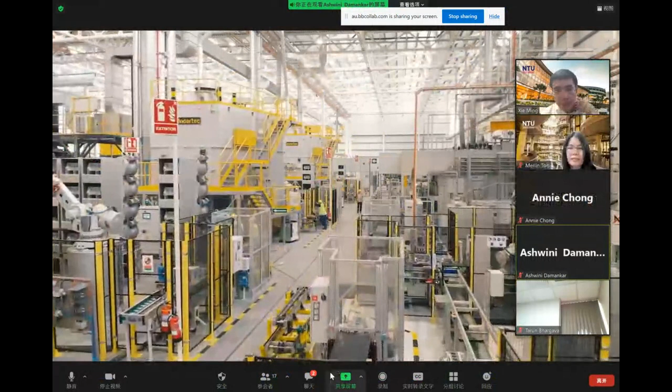Manager of Motores, one of the biggest mechanical plants of Renault. Motores plant today represents 1.5 million engines a year, which is 40% of the global engine production for Renault.

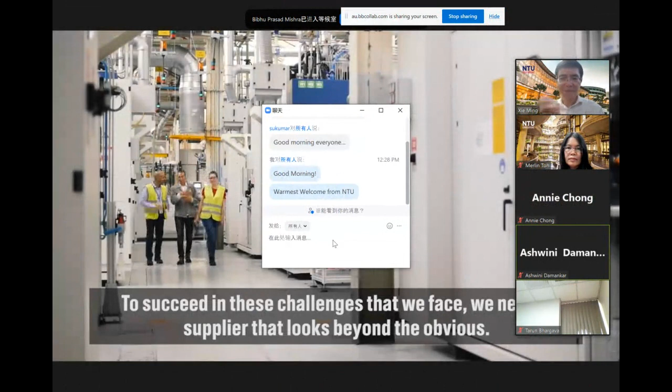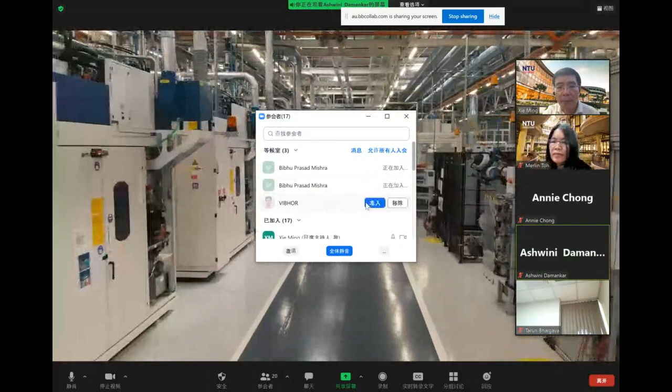Renault and Castrol have a very good partnership just because we share the same future. We have the same values and behaviors, starting with safety, quality, performance.

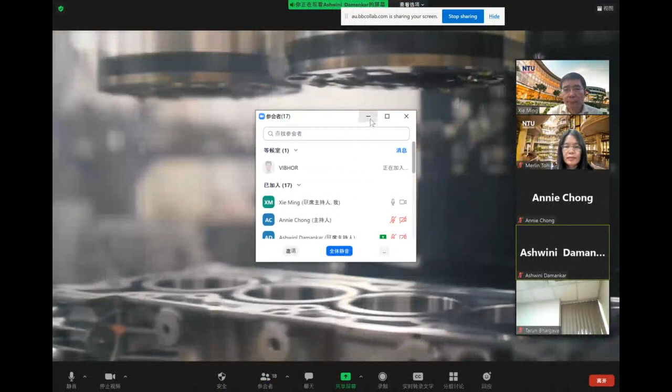What are we looking for about lubricant suppliers? It's the most cost-effective product to go with very effective facilities with digital monitoring. This is clearly the case of the XBB technology and CCC, the compatible cleaner.

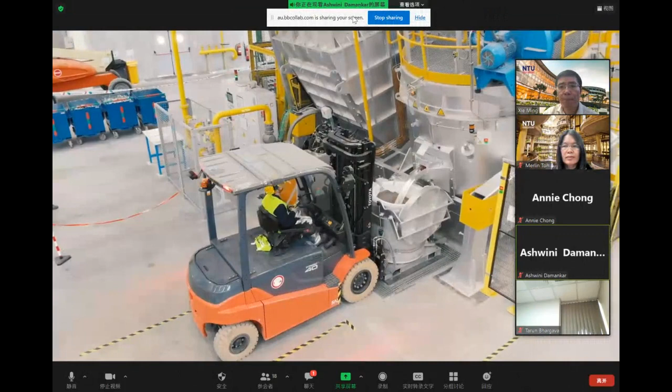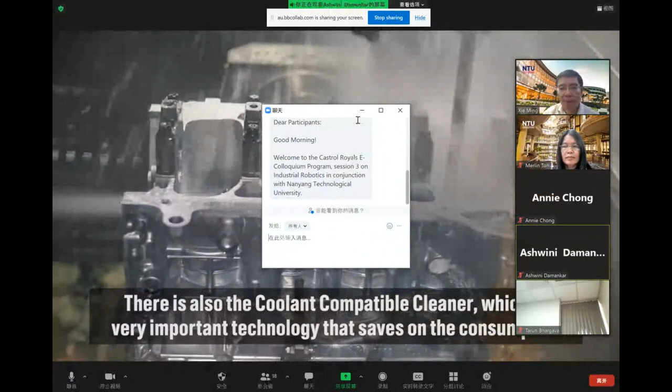With a great innovation from Castrol, we are able this year to save 1 million liters of water. Mediante el cual ahorramos tanto en residuos con la disminución del impacto al medio ambiente como en ahorro de agua, el consumo de agua, y ahorro incluso en productos.

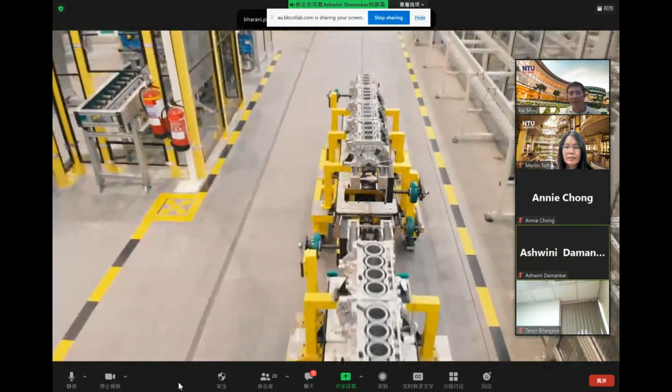When we have this combination of coolant and compatible cleaner inside, we put another resource that is not only the team who manages this, we put the smart control system that we can control 24/7, all the key parameters in the coolant and the cleaner. So it's the way that we close the cycle.

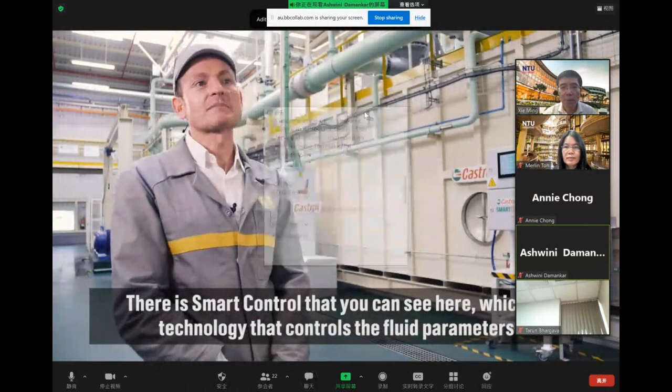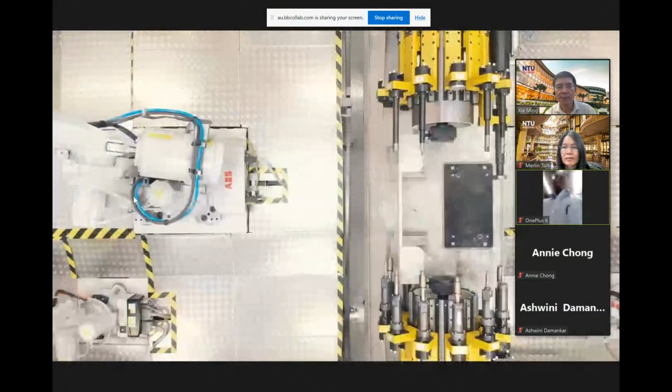This is a real partnership. This is not a relation supplier-customer. The partnership with Castrol is very powerful because Castrol is not expecting the request from Renault, but is very proactive in the way of making new proposals, new innovation proposals.

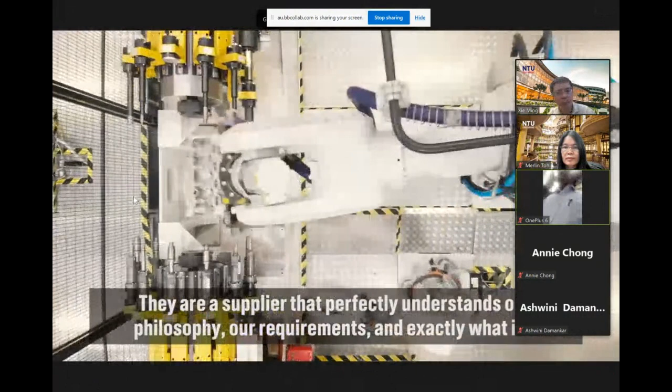Today we have new products with new innovation. We don't know exactly what the future will be, but we know that with Castrol partnership we can reach the sky. We can give the best cost-efficient products to our customer. We know that Castrol will bring us new digital innovation to follow the efficiency of the plant.

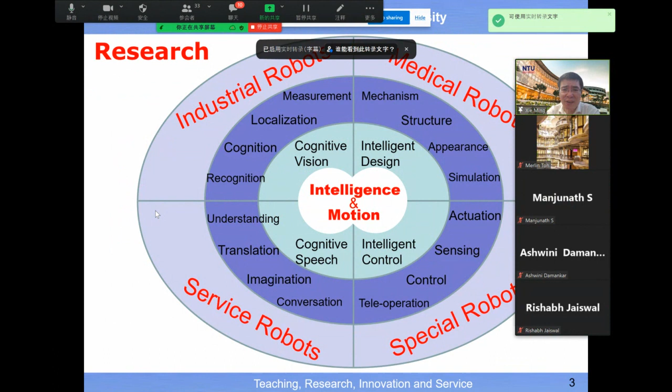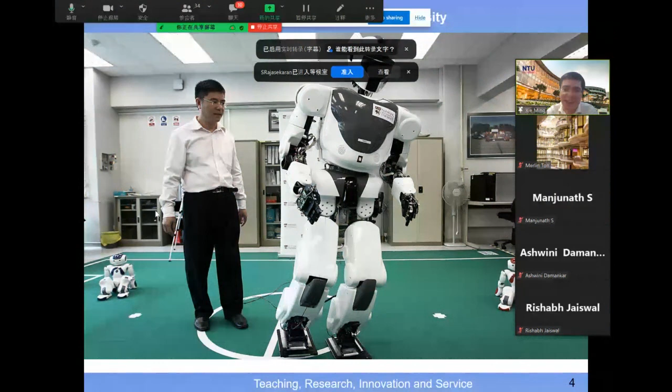This is one of the most powerful robots that we have developed at NTU. From the picture, you can judge the complexity of this type of robot. This video shows a recent advanced humanoid robot.

This shows you the current state of the art in robotics, and in future human-like robots may work in production lines in manufacturing industry. Today, when we talk about industrial robots, the main focus is on the arm manipulator, but in future the arm manipulator can become a dual arm in the form of a human being.

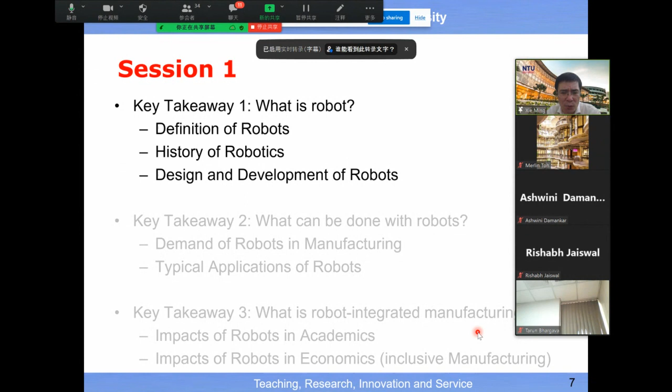If we enhance humans' physical capability through the use of a robot, then you may ask how to position a robot. Today's robot can perform motion, and maybe tomorrow's robot may have human-like intelligence. Maybe after tomorrow, robots may have life-like characteristics.

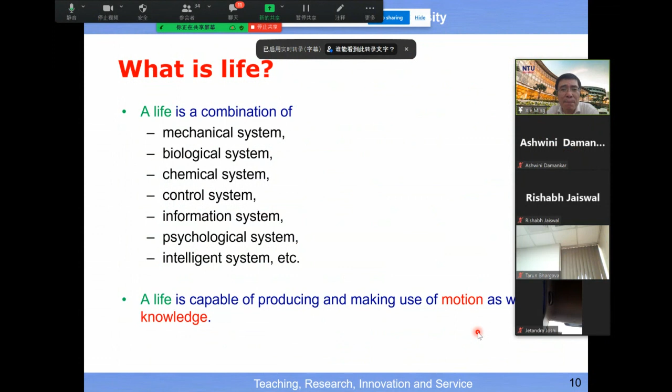The answer should be: life is a complex system which may include mechanical system, biological system, chemical system, control system, information system, psychology system, and intelligence system, etc. Based on this answer, you can find out the characteristic of today's robot. Today's robot includes mechanical system, control system, information system, intelligence system. And we may have other machines which have similar modules built in.

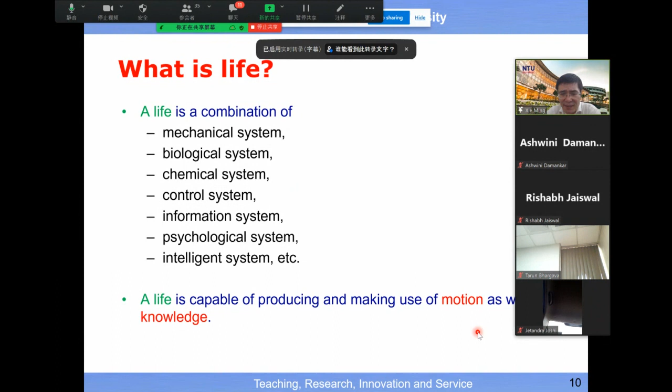Then the next question is: what are the limitations of life in the world, like animal and human being? And even for human beings, we can identify two major domains in which we can easily name some limitation. For example, we cannot fly, and we cannot dive deeper inside the water. So that is a limitation. That means we are limited in time, in space, in terms of the speed of motion, and also for the payload we can carry.

But in terms of knowledge, you may also see some limitation. For example, we may spend almost 20 years in school to get our PhD, master's, or bachelor's degree. That means it takes a long time to acquire knowledge. And in order to process knowledge and perceive information, our eyes cannot perceive invisible light. Also about language, we can only understand or interpret the voice which is familiar to us. For example, if I start to speak French, and you do not understand French, then you cannot understand what I'm talking about. So we have a limited capability to interpret voice, etc.

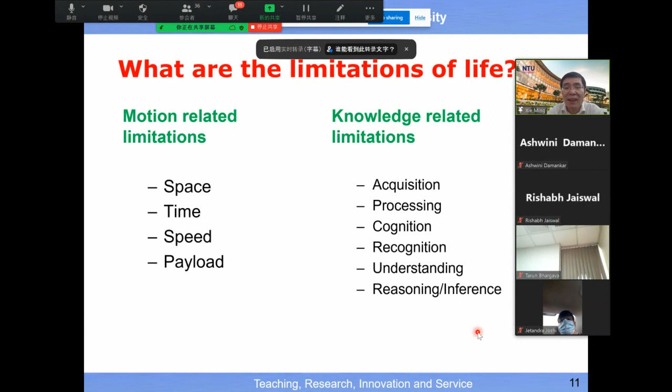So you will see for life, we have a lot of limitations. Then how do we overcome our limitation? The universal way is to invent tools and invent machines. This tool, this machine can help us extend our mental capability in terms of perception, processing, decision making, and also extend our physical capability in terms of locomotion, grasping, and manipulation.

This is why we invent airplanes so that we can also fly. We have robotic arms, therefore we can overcome our limited payload, because we can use robots to carry heavy payload. In the future, maybe we can have a robot to assist us to study, and in this way shorten our learning curve. Instead of spending almost 20 years studying in school, can we shorten this to 10 years or 5 years? So that is the motivation behind the invention of tools and machines.

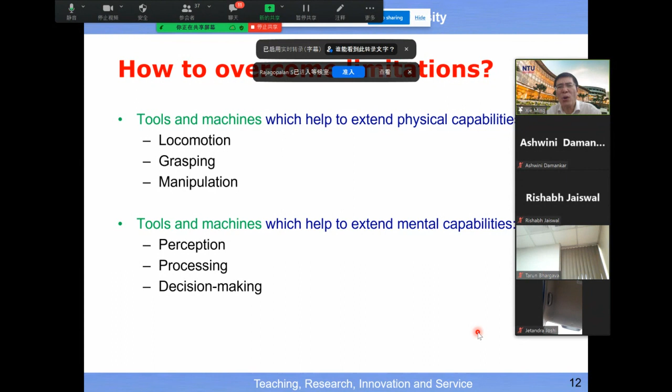Then the good news is, among all these machines, one special type is called a robot. In particular, we have robots which could be deployed in industry. So it is interesting for us to understand the capability of industrial robots.

Among all the inventions, what should be the most powerful one? If we do a little analogy between creations by nature and creations by human beings, everyone understands that the most advanced creature by nature should be human beings. Yes or no? It should not be elephant - we are smarter than elephants. Should not be the horse either, even though the horse can run very fast. Globally speaking, human beings are the most advanced creature made by nature.

Then among all the machines, what should be the most advanced one created by human beings? The answer should not be the airplane. The airplane can fly in the sky, but in terms of complexity of motion, one airplane only has 6 degrees of freedom - 3 translation, 3 rotation. But the humanoid robot, which looks like a human being, has at least 40 over degrees of freedom. So in terms of complexity of motion, the humanoid robot is more complicated than an airplane.

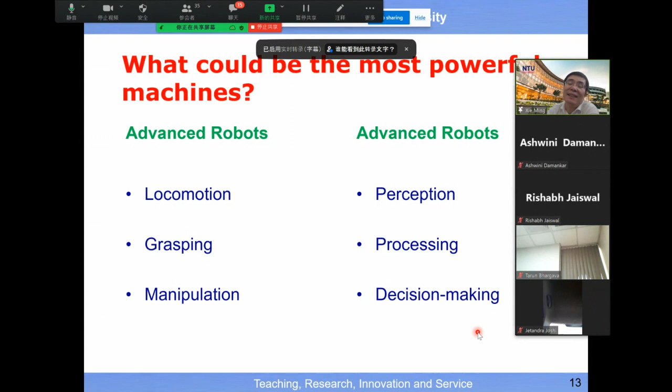But for those of you who follow the news in the media, you understand there's a lot of interest today in AI, deep learning, or these kinds of research. The intention is to let the machine or robot catch up with human-like intelligence in terms of perception, decision making, and action taking. So this slide helps you understand this exciting type of machine invented by human beings.

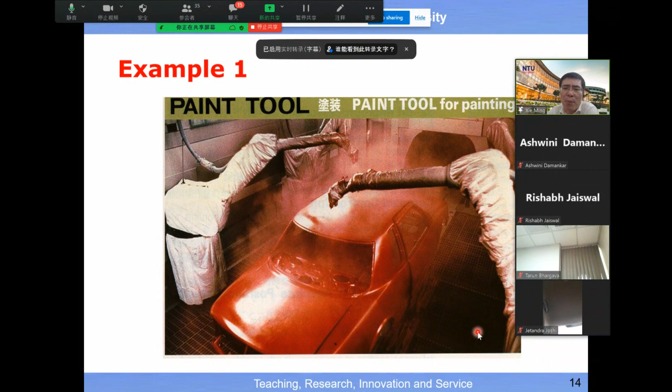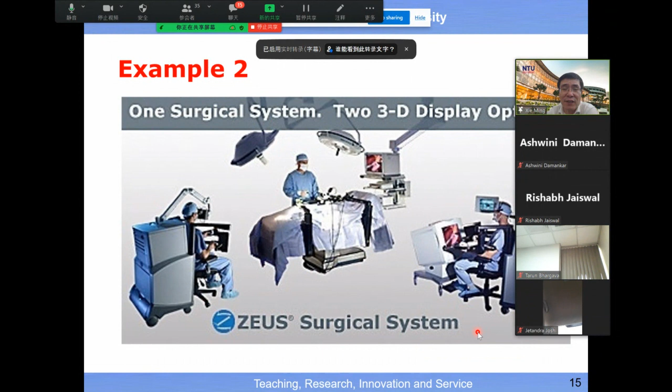Now I'll quickly go through some typical application scenarios where we can make use of industrial robots or service robots. I'll come back again to industrial related applications. By seeing this picture, you immediately understand robots can help us do painting, and robots can extend doctors' physical capability to undertake surgical operations in a very, very confined space, for example, inside the body of a human being.

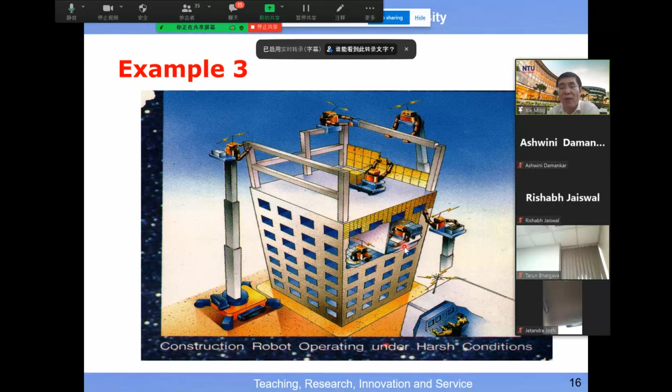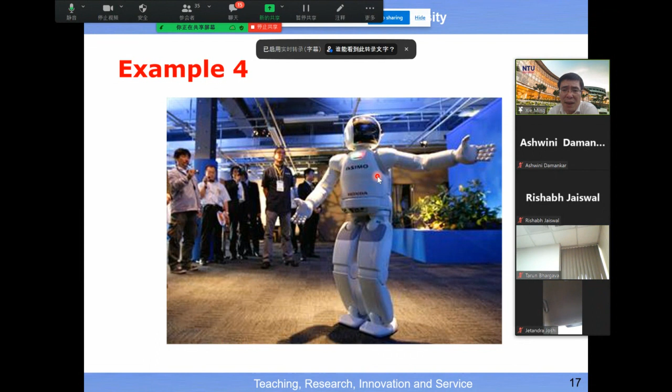And also we may deploy a human-like robot to perform some demonstrations, and eventually it can play the role of a receptionist at a certain place or location or something like that. So based on the recent development of robots, we must redefine the definition of a robot.

If you follow the old definition of the robot, you may notice that statement is not relevant to this robot, because the old definition basically follows the definition advanced by the Robotic Association in the USA. That definition is suitable for industrial robots, but today's robot has already exceeded the capability of an industrial robot from the old days. So here I'll highlight 3 key points inside the definition of today's robot.

The first key point is about the performance of motion. A robot must be able to automatically perform a motion. So this is key point number 1.

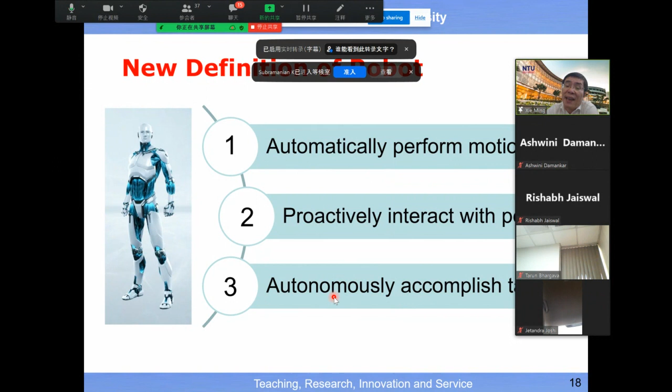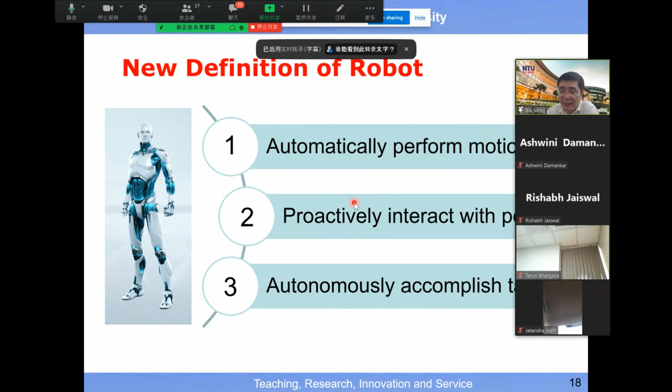Key point number 2 is that today's robot must have the capability to interact and proactively interact with a human being or human operator. And key point number 3 inside the definition of today's robot should be the capability to accomplish tasks. These are the 3 important key points for today's robot to achieve in order to be qualified as a robot.

So now we understand the definition of the robot, with 3 key points inside it. Now let's look a little bit at the history of the robot. If you look at the history of the past 1,000 or 2,000 years, 500 years before Christ, almost 2,500 years ago, you will see an invention made by human beings, by our ancestors. At that time, people had this creativity of inventing human-like creatures. We did not have actuation incorporated into these kinds of creatures, but at least this was the starting point for people to venture into the creation of human-like creatures or machines.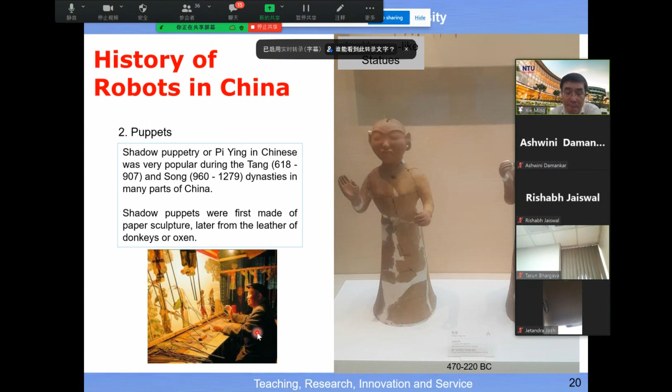Later on, people added actuation to this creature in order to produce motion. Then we have this scenario where the energy comes from a human being, and that energy is transferred into the mechanism of the creature so this machine can also undertake motion. This could be the starting point for our ancestors in the early days to have such intention to invent human-like machines.

But in the past 100-plus years, less than 200 years, this is the modern history of robotics. We need to remember 3 important events. The first one is about the birth of the term robot, which occurred in year 1921 — this technical term 'robot' was invented. Then the second event is about a writer in 1941.

The robotics term has been invented. The third event is about the birth of the robotics industry. So what was the first company in robotics that was set up? The answer is this: in year 1956, this is the first robotics company which was set up, in the USA.

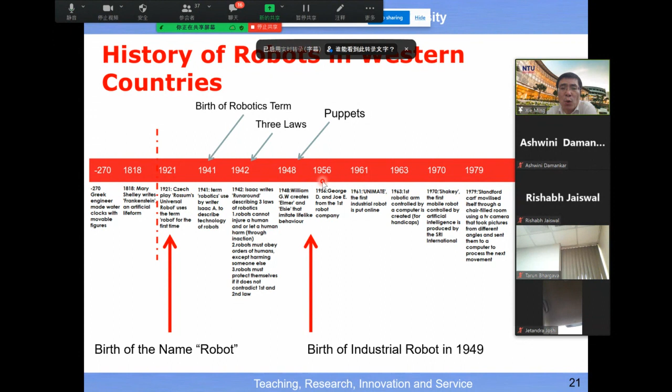So this setup in robotics occurs in year 1956. This just gives you the idea about three important events in the modern history of robotics: the term robot was invented, the term robotics was invented, and the first robotics company was set up in the world.

Then it is interesting to know, if you look around the whole world, which country has put the most effort into the development of the robot? The answer is Japan. It's not the USA, not Canada, not France, Germany or UK. I believe it's Japan which has put the most investment and effort into the development of a robot.

If we ask you to name the top companies which sell industrial robots, you could name at least two companies from Japan. Motoman is one, and Fanuc is the second company. There's the Fanuc robot and the Motoman robot. These are the two leading companies in the world which offer industrial robots.

Then in Europe, you have ABB, a company from Sweden. Then there's another, previously we called it Stäubli, from Switzerland. And in the US you may name Adept. But if you compare the strengths and state of the art in terms of industrial robots, I believe the top three are ABB, Fanuc, and Motoman.

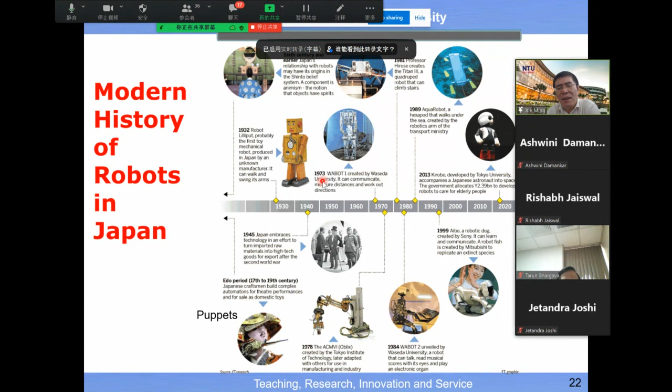Two of them are from Japan. Besides that, Honda, an automobile company, has developed the most advanced humanoid robot. This slide basically highlights a bit of the short modern history of robotics in Japan. You'll see this is a very interesting country which has paid a lot of attention to the development and advancement in robotics.

If we look at the history of robotics from a single company, Honda is an automobile company, a car maker, not a robotics company. Yet you will see it has put a lot of effort into developing the most advanced robot, because a humanoid robot is more complicated than an industrial robot. In the world you cannot find a second company, in general, for overall performance that can outperform Asimo, the robot developed by Honda.

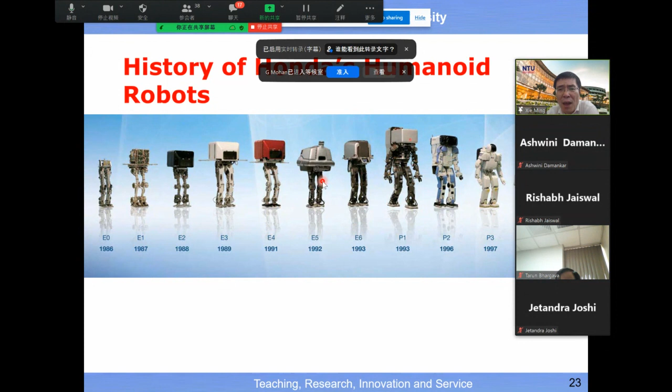Also the US company Boston Dynamics - at the beginning you saw the video, that humanoid robot was developed by Boston Dynamics, a USA company. But that robot only demonstrates motion capability; in terms of appearance and other capabilities, they cannot outperform Asimo, the one developed by Honda.

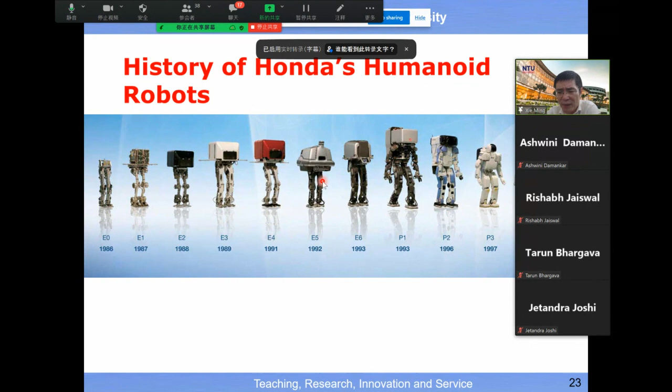So this slide basically shows you the capability of a humanoid robot by Honda, the overall performance which involves locomotion, vision, grasping, and manipulation.

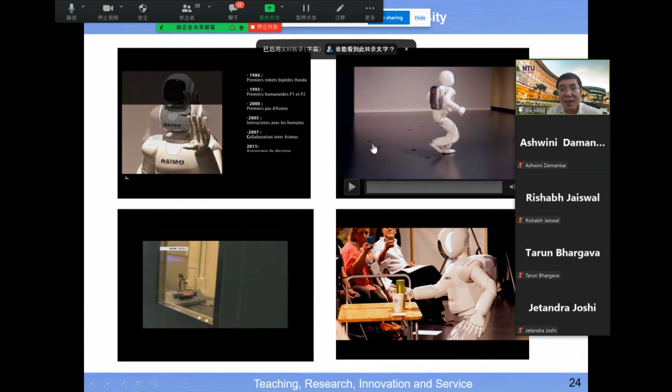Based on this result, you can start to think about the impact of a humanoid robot on industrial application. Eventually you may raise questions, and during the Q&A session we can discuss this.

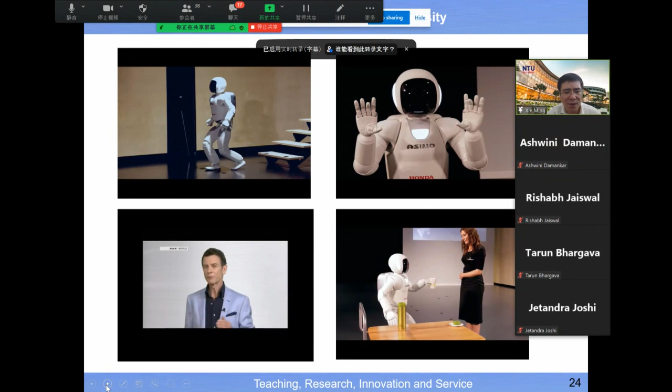Mobile robot may include today's vehicles. Actually, we cannot name today's vehicle as a robot, because today's vehicles have not yet reached the level to perform motion automatically or autonomously. We also have a lot of research in the direction of developing autonomous vehicles, but this is an effort to make today's vehicle behave like a high-speed mobile robot.

Now you see the importance of robotics, because we try to absorb the automobile industry and make it become part of the robotics industry. This is because a lot of technology developed in the area of mobile robots can be implanted into today's vehicles, making them high-speed mobile robots.

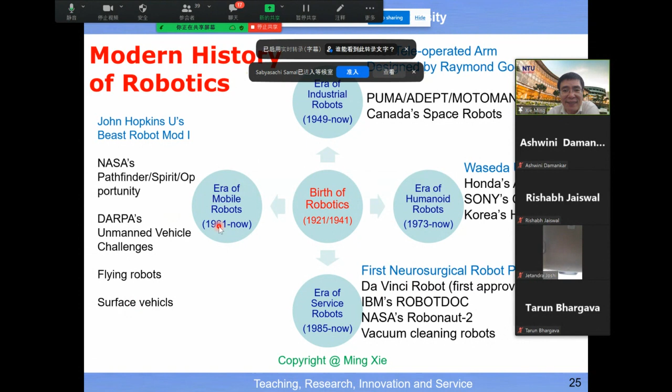And this one is very interesting eventually, a vehicle that can move on the surface of the water, so you become part of this mobile robot. This gives you an idea about the importance of robotics in the future.

Now we dive a little bit into the technical aspect of robots. What exactly is the detail of a robot? We told you the definition with three key points: a robot is something which can perform motion, interact with a human being, and perform a task. So let's discuss the capability.

The first module is motion planning. The second module is kinematics, the third is the dynamics of the robot, and the fourth is robot control. Then we may have another module about the design of the robot body, and we may also have an entire course about AI or robot intelligence. This gives you the big picture of robotics in terms of technical detail.

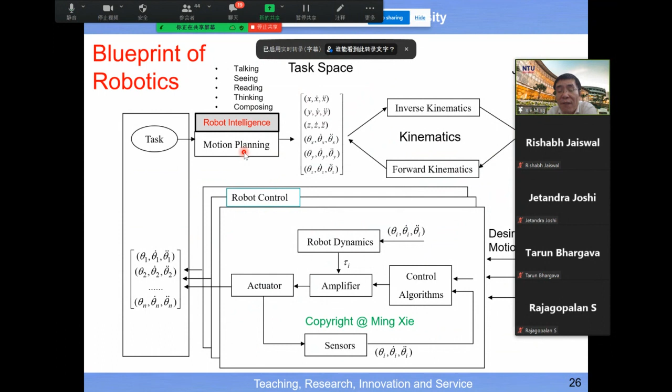Okay, so now you understand the answer already. So we advocated this in year 2009: robot intelligence must enter the third phase, or third generation. Eight years later, in 2017, China recognized, okay, we must enter a new generation. But they do not understand this slide—they don't understand the generation has already passed. We are still in the first generation, one generation behind today's state of the art.

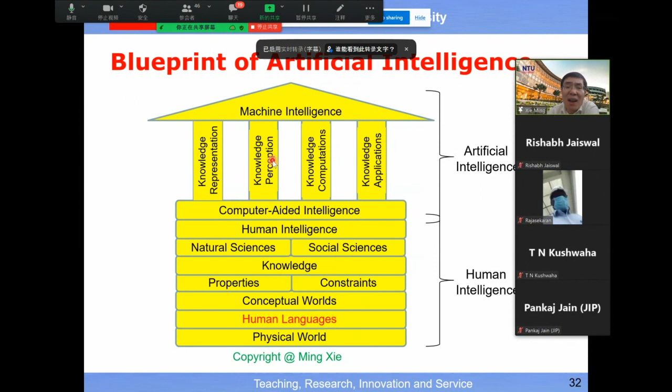Now here I show you the 4 pillars which enable us to reach this level of true machine intelligence. These are the 4 pillars, just for you to know.

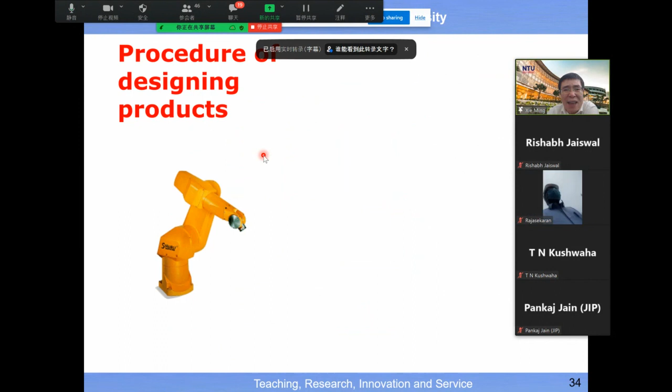Now I quickly go through the procedure to design a robot as a product. This is a general guideline for us to design anything as a product, and we can also apply this procedure to guide us to design robot as a product.

I believe since all of you come from industry, you can make a decision of buying a robot, then program the robot bought by you, and automate your production line.

You can make another decision of setting up an in-house team to develop a customized robot to meet your production line demand. Then your in-house team can follow this procedure to design and implement a customized robot which meets the requirement of your production line.

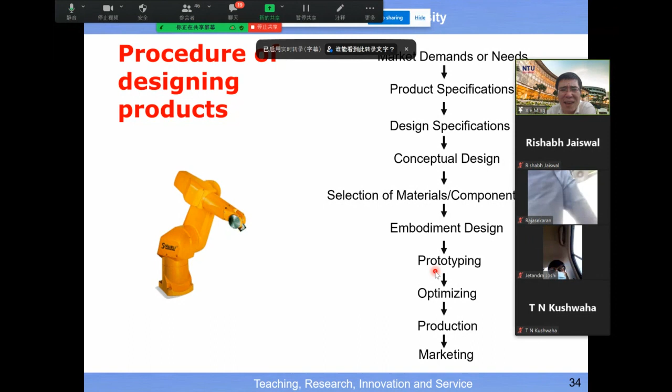So you have two options. I just showed you this knowledge and this guideline, so you can make these kinds of decisions.

Once you decide to have an in-house team to develop a customized version of your own robot in order to meet the demand of your own production line, this is the idea you need to have.

A robot basically is a machine which can perform motion and also perform a task. You can carry the tool. If the tool is a welding gun, then you can do the welding. If the tool is a spraying machine, then you can do the painting, etc.

The robot is programmable, so there is minimum interaction with a human being. That means the operator can change the program, and the robot can respond to the new program uploaded inside it. Since you can change the tool and change the program, you can undertake different tasks, which is why we call it multifunctional.

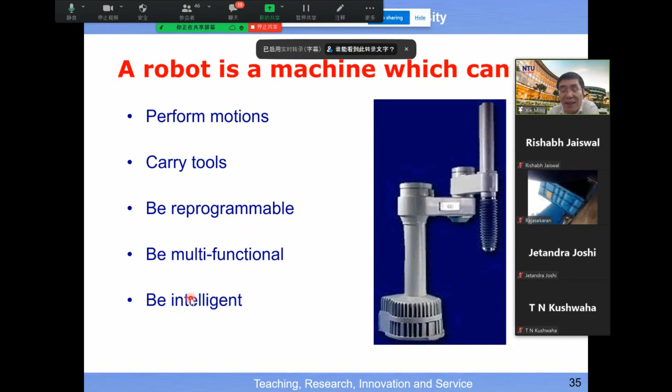Then depending on the level of intelligence, once you are going to design your in-house version of a robot, you need to have a team or sub-team: one to take care of the mechanism, the body of your robot, and one team to design the programming system of your robot, then another team to take care of kinematics.

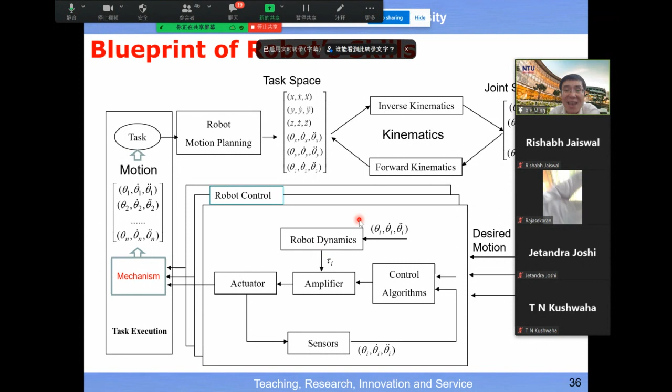Based on this blueprint, you can organize your in-house team into different subgroups already. Then, what are the minimum requirements for your in-house team?

You can say I cannot afford to have a full team to develop a product like a commercial product with complete features, so these are the minimum groups: one group to take care of actuation, one control group, and one programming software group.

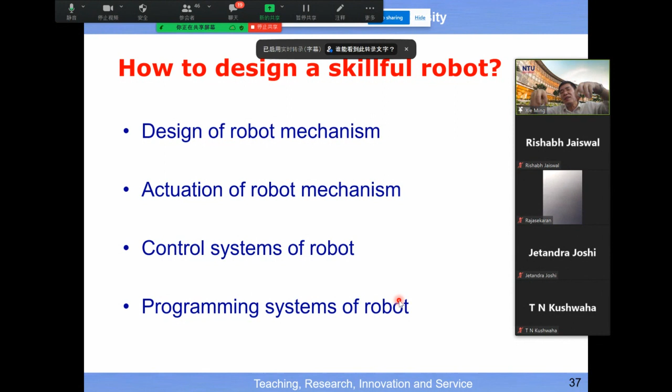To take care of the last two aspects, you need a control team or control group and a software group. So if you want an in-house team to build the in-house version of the robot, at minimum you must have 3 groups of engineers to work on this.

Then for your mechanic group, what should be their job scope? Their job scope is to design the mechanism, and the second one is to take care of the actuation, to put in the actuator to power your robot's body. So what is mechanism?

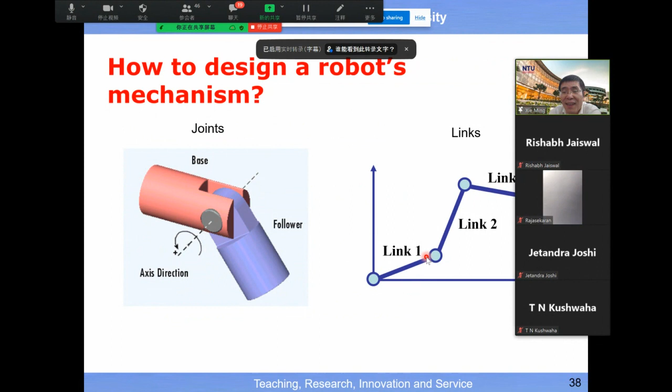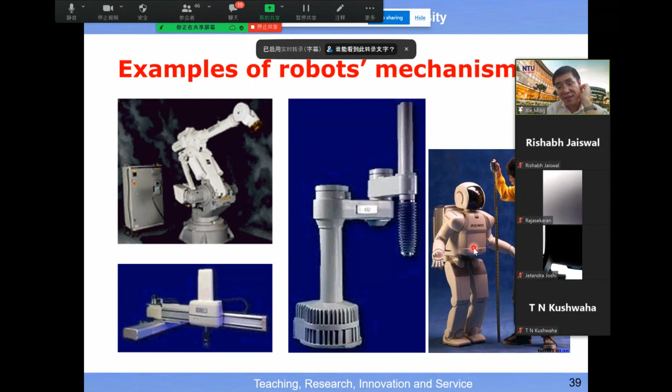So then the second job scope is to provide the motion to actuate the mechanism. Let me show the video. Actuation means to produce motion.

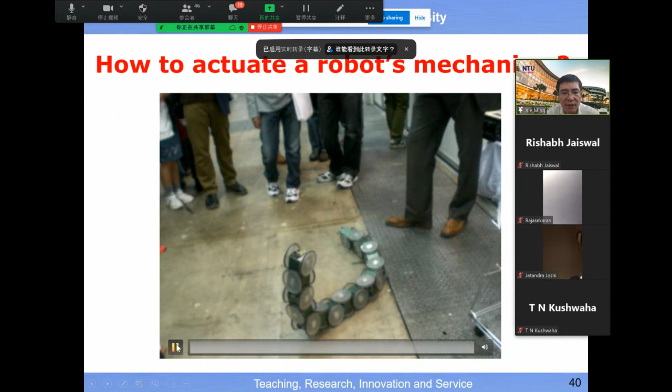This is something for you to know. The conventional way to actuate a robotic arm is to insert a motor actuator inside the joint. This motor actuates the joint, then the joint drives this link. I insert another motor here to drive this joint.

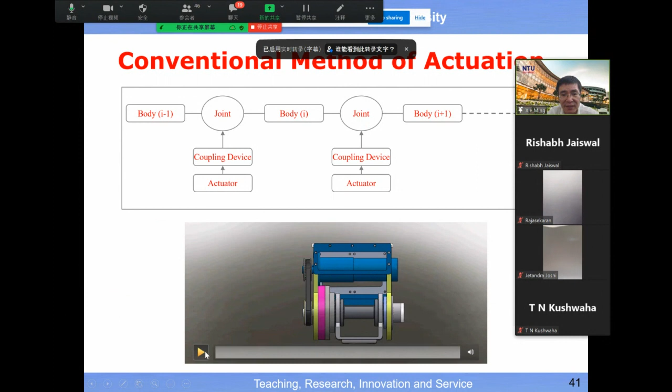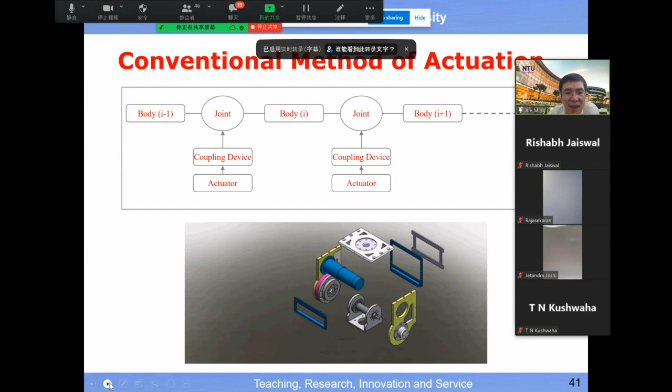Let me show you a design example. This is the actual design example. Here, this is the shaft of the joint, etc. One more example here, this is a SCARA robot, but this is a real design.

For those of you with the design background, you can look at this diagram. So you have a bearing, this is a motor, etc.

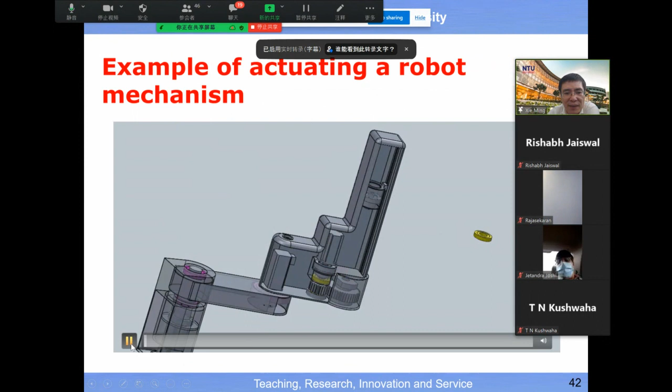So this is just an example for you to know that conventional actuation is actually not reliable. If one motor fails, the entire body fails. But in the case of a human being, if I have pain in one piece of my muscle, I can still move my arm. My entire arm will never fail even if I have some pain with one piece of my muscle. But for today's robot, if one actuator fails, the entire arm fails.

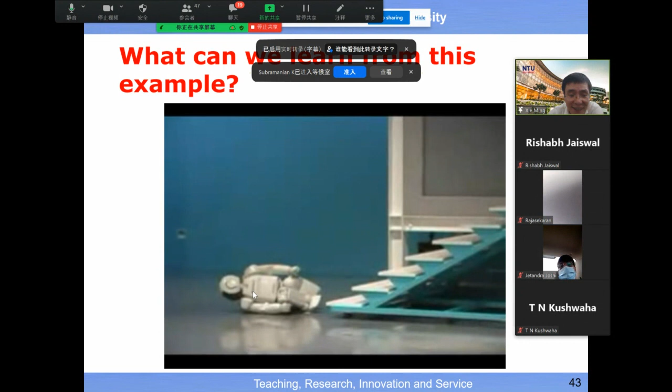So this is no good, right? Remember this. Is there any solution to overcome this? The answer is yes, because this is an invention by us in year 2000, almost 20 years ago. So we achieved a similar result to human-like actuation.

Instead of doing one-to-one coupling, that means inserting one motor into one joint, we can do one-to-many actuation. If we can do one-to-many, then we can put two motors here, and each of these motors can couple to all these joints. Then only when two such motors fail will the entire arm fail.

If we have 6 motors here driving 6 joints, then only when all 6 motors fail will this arm fail. So this is our solution that we developed almost 20 years ago. So here we just show you the prototype that we developed.

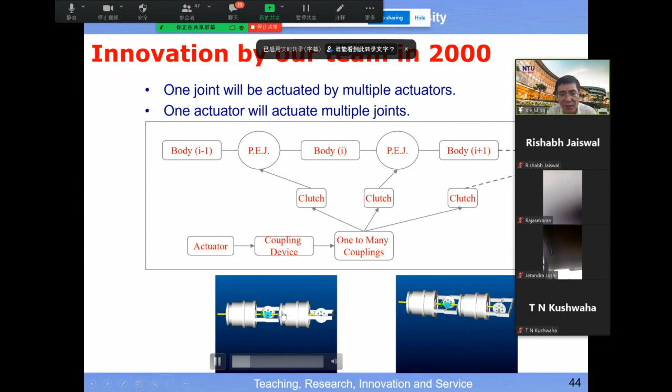So inside here, you see one degree of freedom, second degree of freedom. So all this motion will share a single motor. And this is the real prototype.

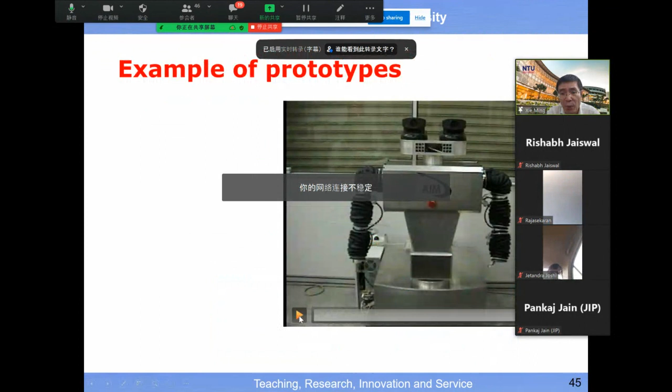Each arm we have, inside we only have a single motor we developed 20 years ago. So we have a single motor here, and this arm has 20 degrees of freedom.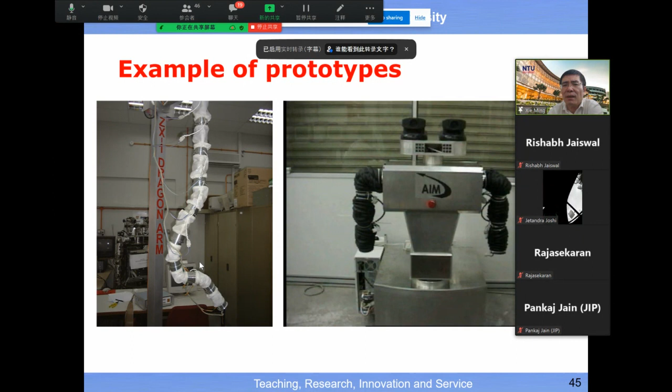That gives you confidence about the mechanical reliability of the industrial robot. If we really want to achieve this reliability, it's not an issue. So at least you can believe today's robots are very reliable in terms of motion execution, and that gives you this confidence.

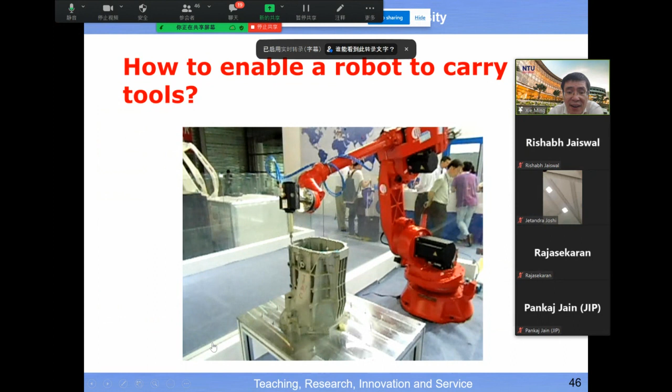Then how about the performance of a task? The answer solution is quite straightforward. At the end, at the hand of your robotic arm, you just attach different tools. If you're polishing the edge of a workpiece, you attach one type of tool. If you're going to do welding, you attach another type of tool, etc. So by changing the tool, you can let the robot perform a different type of task.

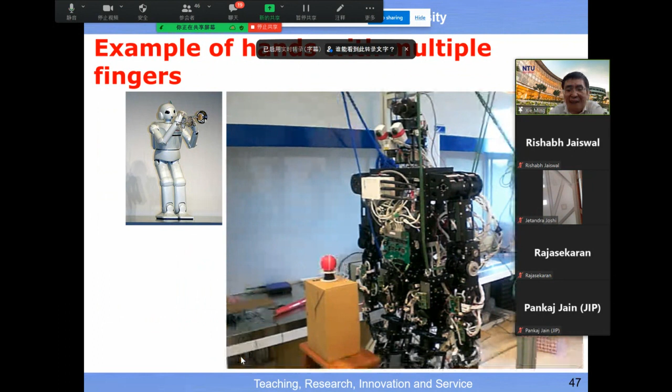But here we just show you the autonomy for today's robot to achieve. This is just a typical example of hand-eye coordination, and this behavior is fully autonomous, performed by the robot. This level needs to undertake hand-eye coordination.

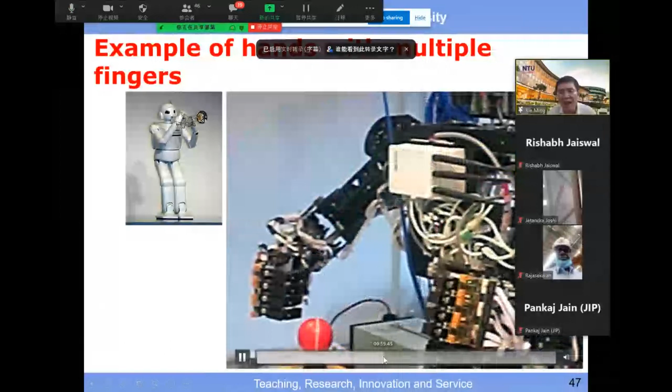Control the motion accordingly. Then in terms of control hardware, if your robot has many feedback control loops, for each feedback control loop you have 3 basic building blocks, as highlighted by this slide.

You must have an actuator, a sensor to provide feedback, and a controller. This is one control loop. You have another control loop, and another control loop. Therefore, you have multiple control loops.

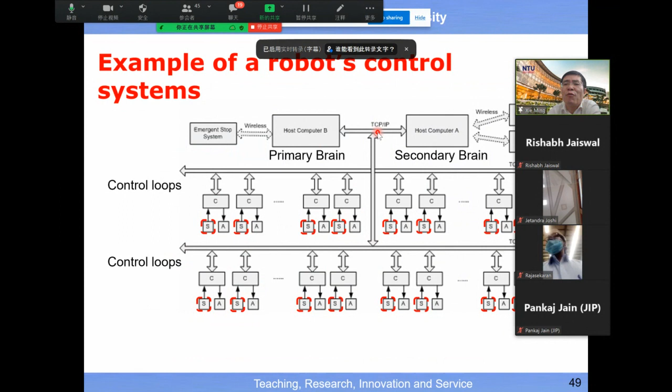And then if your robot has many degrees of freedom, the robot must have a powerful brain. Eventually you have a primary brain and a secondary brain, like a human being's brain. So this is the hardware support for the control system design.

So then the third team should be the software team, because you are able to control the motion of the robot's body. Then the next question will be, what should be the desired motion here? This information must come from the task to be performed by your robot. Therefore, you must have a team which takes care of motion planning.

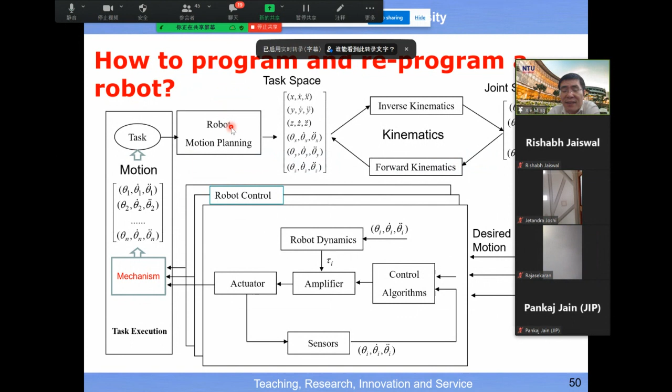So just now I asked you to think about this question: could today's robot take a task description as an input to automatically produce motion as output? The answer is no. This is what we want to achieve in future - to have a task description as an input and let the robot do this instead of an operator, because today's robot cannot take this as input, as AI has not yet reached that level of achievement.

Then what will be the solution? We have no choice but to employ an operator here. This is just for you to understand: when you deploy a robot in your production line, you need to spend time to do the setup, to do the programming, or to do the teaching - to teach your robot to perform the task.

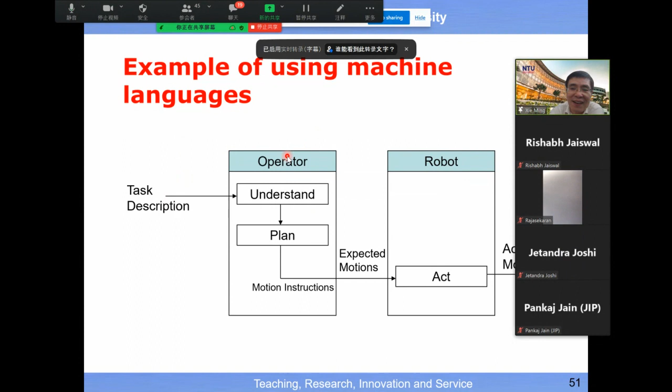So it basically is this scenario. Now you understand what's going on when you buy a lot of robots to deploy in your production line. Then you see how come I must spend a lot of time to program each robot. So this slide helps you understand the answer already.

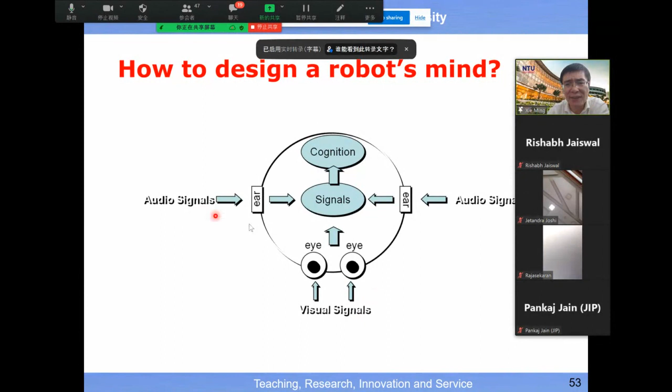So this is a challenge for us to take on, and today we are not yet there. We are more or less building up the new foundation. You can see that real progress in AI maybe started just 10 years ago, because before that we remained still at a certain level, but that level is not the robot's true intelligence - it's just computer aided intelligence.

So now you understand the reason, because it's only recently we started to venture into this direction. So this is why for today's robot, you should not put a very high expectation on its intelligence. Even for industrial robots, you should not have this expectation - just buy a very smart industrial robot. And also with this knowledge, you will become vigilant. If a vendor approaches you and tells you that their industrial robot is very smart, very advanced, very intelligent, try to be careful about the overclaim by your supplier, understand?

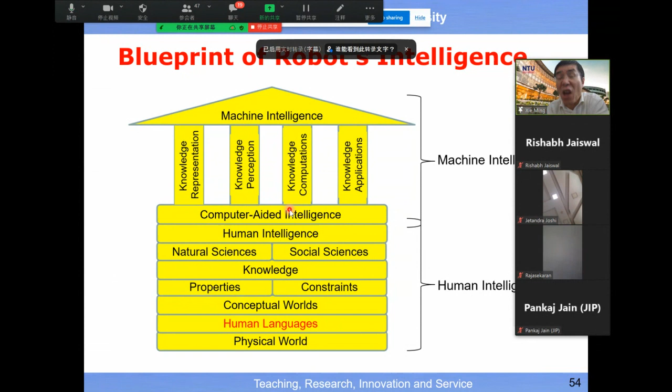So this slide helps you to judge the level of intelligence of today's robot. So today we still need or require human beings or human operators to assist industrial robots to learn the motion to be performed. All right, okay.